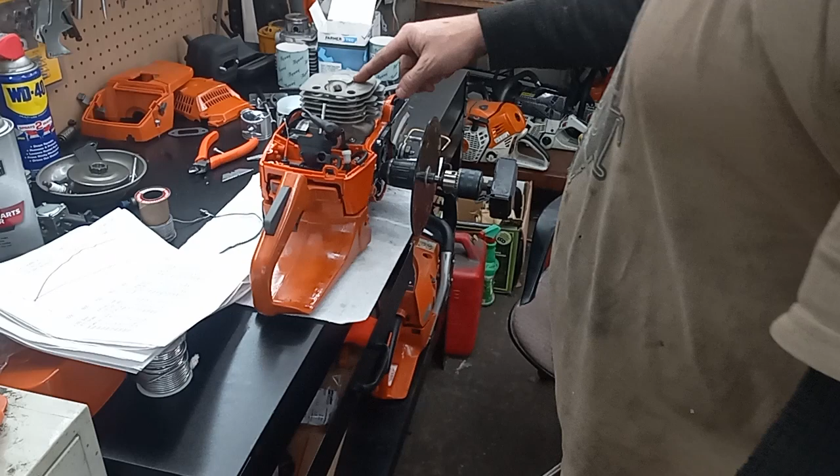This is that cylinder I cut the base on. I'm just checking things out. I haven't even had time to touch this today, and I'm probably not going to touch it today. Figured I'd make you a video on some of the results.

So let's go over some of them. The 4910 that I detuned, I took the pipe off from, that one that made 7.4 horse that I detuned, put a different cylinder on it. I was aiming, to be honest, I wanted about 6.5 is what I wanted, but I'd have settled for 6.

But I did some experimental things. I mean, you guys that follow the channel, you know, I tinker, I dabble, I experiment. I'm always trying different stuff. In fact, the last 3 days I've had this on my brain, that's how my brain works.

I've had this on my brain, but I've been trying to hunt down a 661 crank because I want to de-stroke a clone 660, and I want to use a 661 crank and piston in a 660 big bore top end on a clone 660 and see what happens.

I used to de-stroke 400 small blocks in the racing world. I used to de-stroke them with 350 cranks, and they ran like scalded dogs. So I thought I would apply it in a chainsaw and see what would happen.

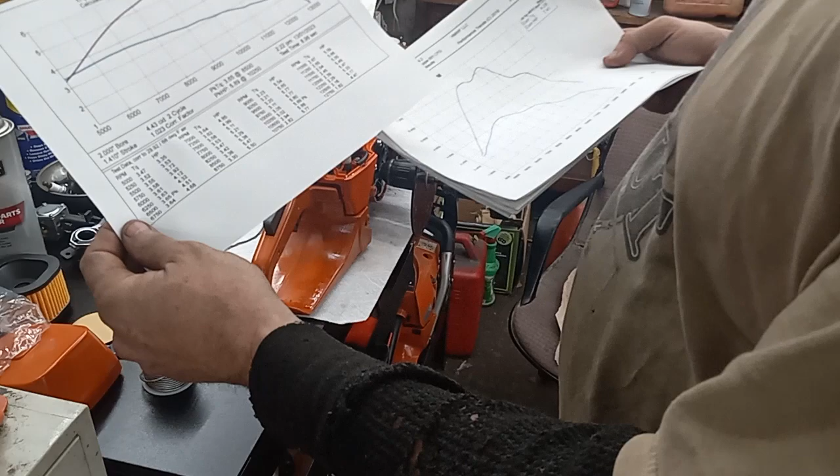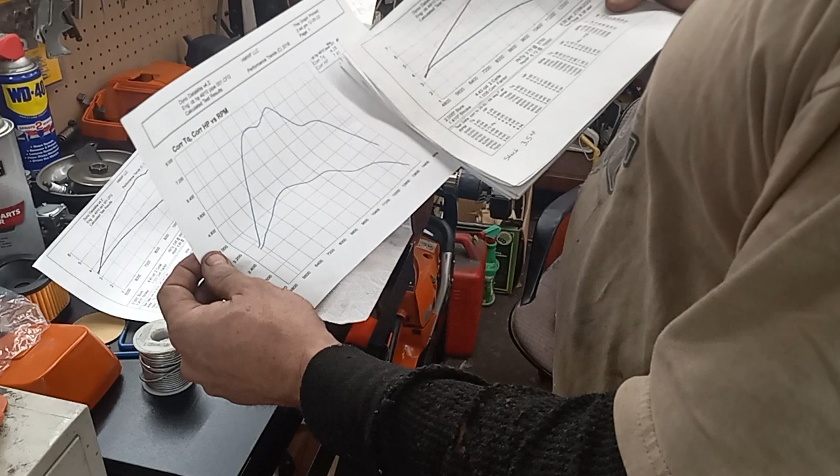But that's the dyno sheet for today. It was done today, but put up 5.89 at 10,250 is where she peaked out, and that was the 7 point. That's the same saw, but when I put up 7.41, but that was on a pipe in crazy port work.

Let's see here. This one made 6.12. That's the one I competed with at 10,000. That's kind of what I'm curious at. So this one's peaking 250 RPM higher in the cut.

So, but I was gearing this saw more towards a get-together saw. I still follow the firewood rules, but...

Let's see here. That was this is another one of my 4910 dyno runs. That was a really good saw. I ended up selling it. Kind of wished I hadn't. It only put up 5.23, but man, that was a firewood cutting machine.

So that's another one at 7.2 horse. Okay, I don't think I've talked about these, but I had the 670s. Both them 670 Jonsereds have been dynoed.

One put up 6.85, almost 7 horse. That's the one I did the 36-inch long bar video on.

And my other one is 7.7. I got two different graphs. This one's not laid out the same, but the 7.7 physically cuts faster, but it's a more narrow power band due to the fact it's a shorter blowdown saw.

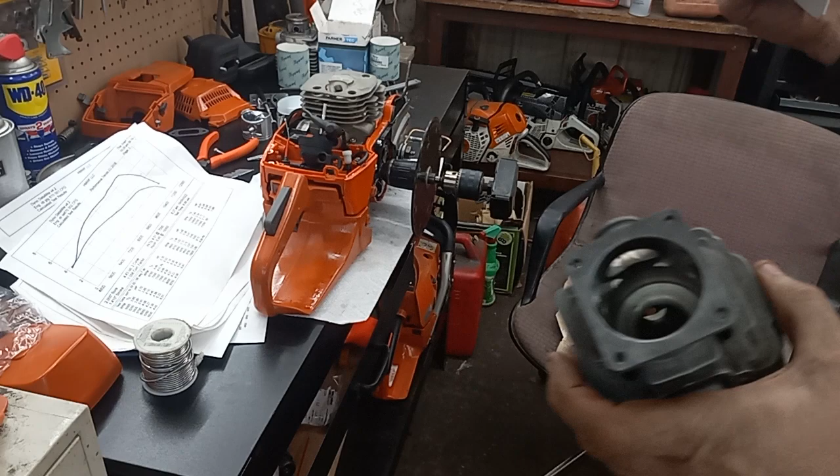The 36, you guys are probably pretty interested about that. It put up 7.4 originally with this cylinder. I know I'm babbling on, probably boring you guys, but this cylinder, I had a velocity stack and a pod filter on it, and it was 7.04 horse.

I took all that off and put it back in stock trim, left the same identical muffler mod, but ported it differently, more geared towards a work or mild play saw. We did a bunch of runs on it, and it averaged 6.5 horse, but it did touch up to 6.8 a couple times.

Dynos are funny things. As saws heat up, things change, tunes change. We tuned on the carburetor a couple different times on these runs, but that's still at 11,750, almost 12,000 RPMs where she's peaking at. That's why that thing blisters through the wood like it does.

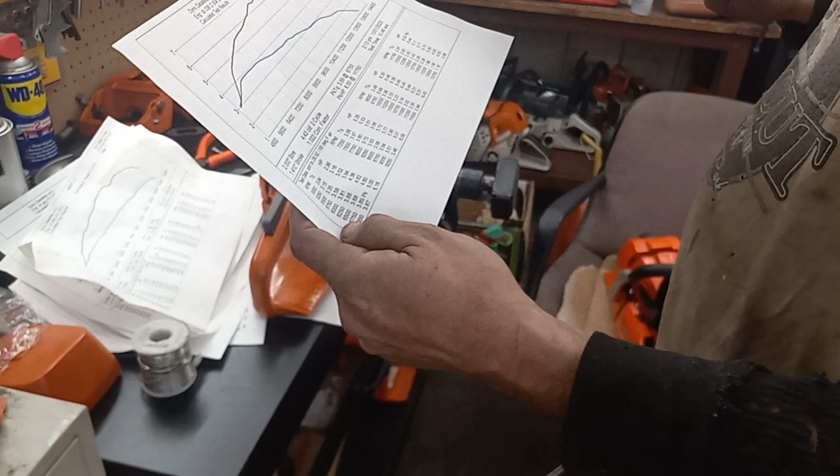Look at the power curve of it. It's a really good work saw. That's just a good all-around saw.

Now, just for giggles and morbid curiosity, I took the 872i Neotech down there that's got that ported Warhawk cylinder on it, and it averaged out about 7.25. I did see it hit 7.5 a couple times on there. It was tuned a little rich. Didn't bother to try tuning anything on it, I just wanted to throw it on there and see what she would do.

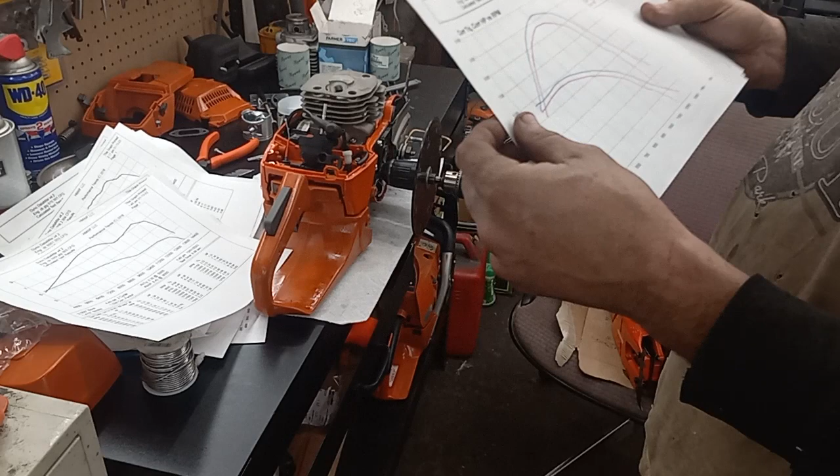One's 9.29 and the other one's 8.7. Now I suspect this 8.7 one with max airflow or a high flow air filter like I built for the other one will probably pick up close to a half a horse. We did some testing pulling air filters on some other saws, and it's amazing - pulling an air filter, some of the saws gained a half a horse. But those 461s are beasts.

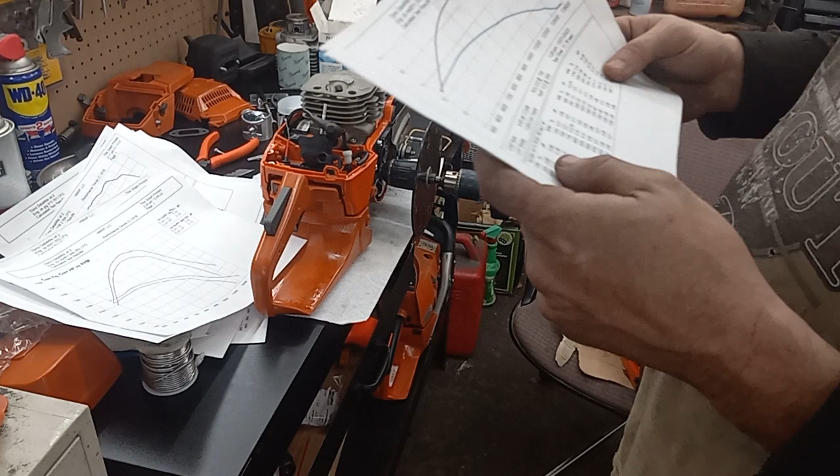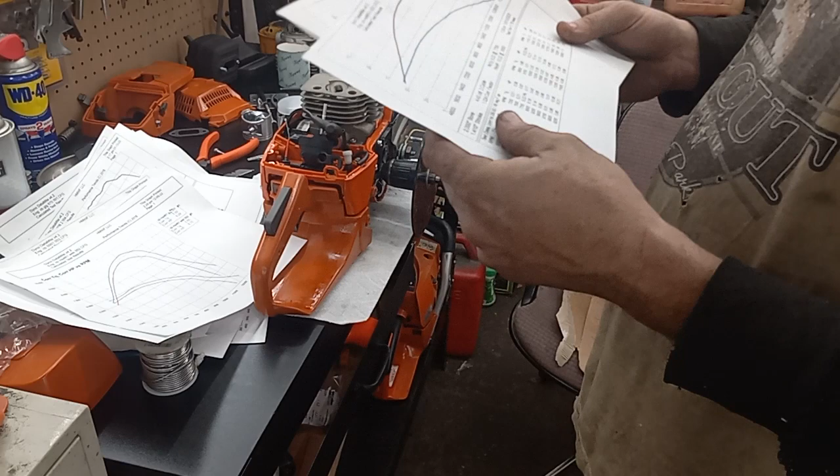So that's the 461s. The 661C M-Tronic that I did put up 10.2 horse average. I did see it get up around 10.5, and then we didn't get a sheet on it or whatever, but when we pulled the filter, it gained almost a half a horse just by pulling the air filter and that snout thing off the back.

So that saw is definitely - I'm going to have to save my pennies. That saw is most definitely going to have to get it. The 500s and that 661 are definitely going to have to get a max airflow kit or some sort of aftermarket filter. Half a horse difference just by popping a filter is huge.

The Neotech 660 - I got some of the failure runs and some of the good runs here. The first time I ported it, this one's 919. Okay, this would be the first time I ported it. It was 8.29. I was severely disappointed in it.

That was with it - I think it was when it had a 94 exhaust roof, I'm trying to remember. It cut good, it was a decent cutter, but I was disappointed in it. And then I went in it, blew it up, then rebuilt it again. I got 8.64, and then this time around, third time's the - well, this will be the fourth time, it's averaging 9.63.

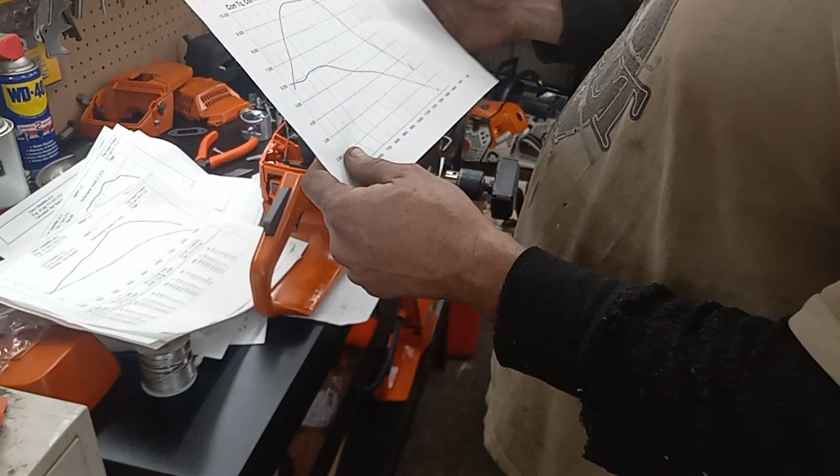I did see it hit 10 on a couple of the runs, but Joe did an average of all the runs that I did on it or whatever, and out of all the runs it's averaging 9.63. That's its latest port version. It's running pretty good.

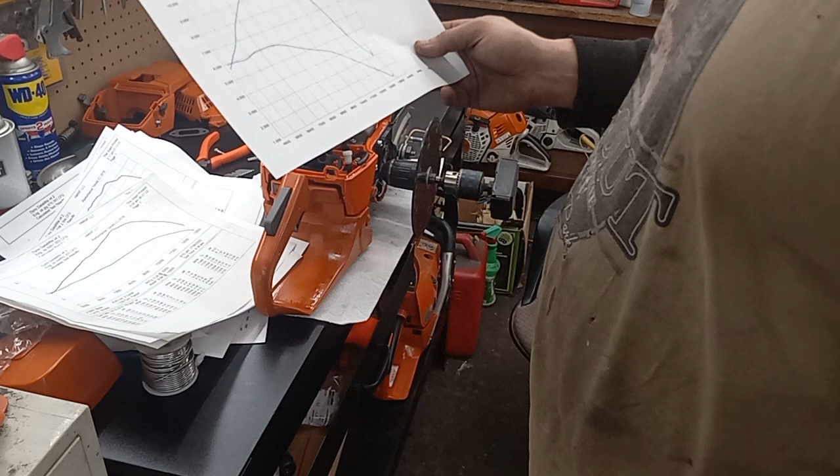The saw that's giving us these runs has a Chinese carburetor on it. I think if I put a Tillotson or a good Walbro carb on it, and built a muffler like what I've got on the 661, and took about 3 degrees of blowdown out of it, plus added a degree or two more in intake timing, I could probably get that saw to 10.5 pretty easy.

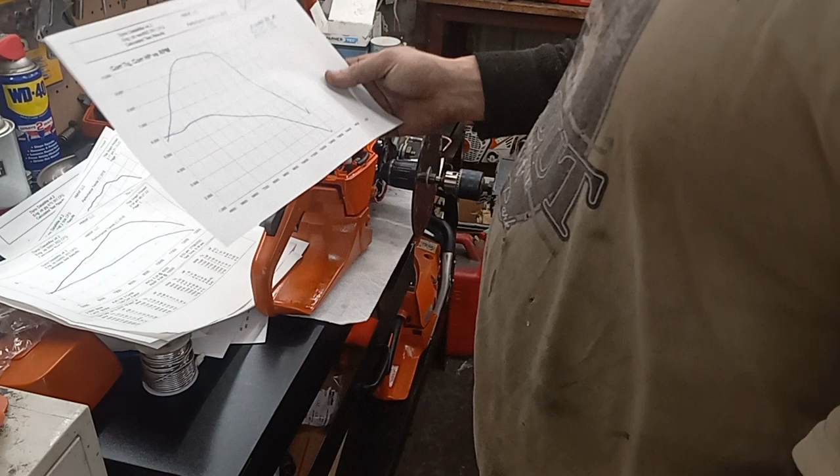I might revisit it and try it again. I don't know, it's just for Clone Wars. I might just leave it alone the way it is, build a muffler, and leave it at that.

So I think that covers all the dyno runs I had today. Pretty good numbers, like I said. I'll keep you guys updated as I'm doing this.

I'll show you the new project right here. It's a CS620P that he robbed some parts out of. It's never seen wood. Joe did do a video on this saw on the dyno. This has a vaned crankshaft in it, or knuckle crank, or whatever you want to call it.

When I was over there, I asked, kind of hinted around if he had any projects that I could pick up for the channel, and he showed me this, so I purchased it off him.

I like 620s. It's not been ported yet. It does have a vaned crank, so it might be kind of interesting to see me port this and what happens with a vaned crank. If I don't like the vaned crank...